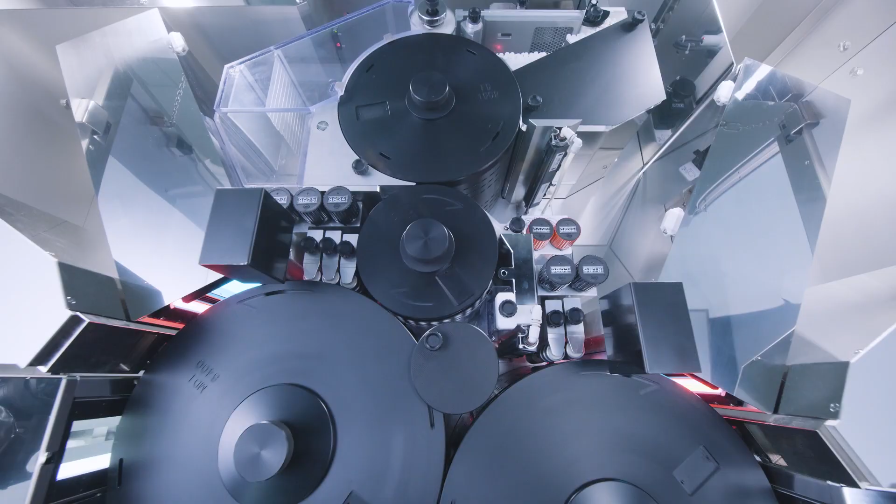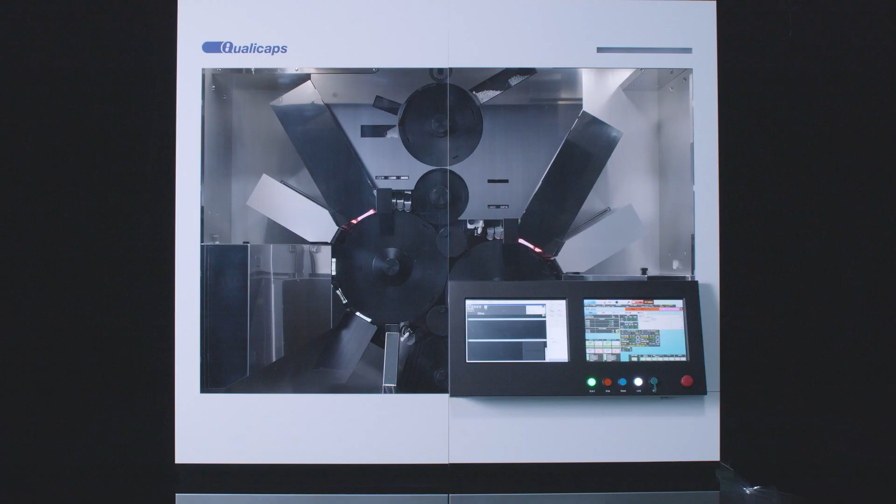There has been an increasing need for tablet printing in order to prevent accidental ingestion and counterfeit drugs. Qualicaps' newly developed IMS-400i is a tablet inkjet printer capable of contactless tablet printing. Let's take a look at the IMS-400i's printing process.

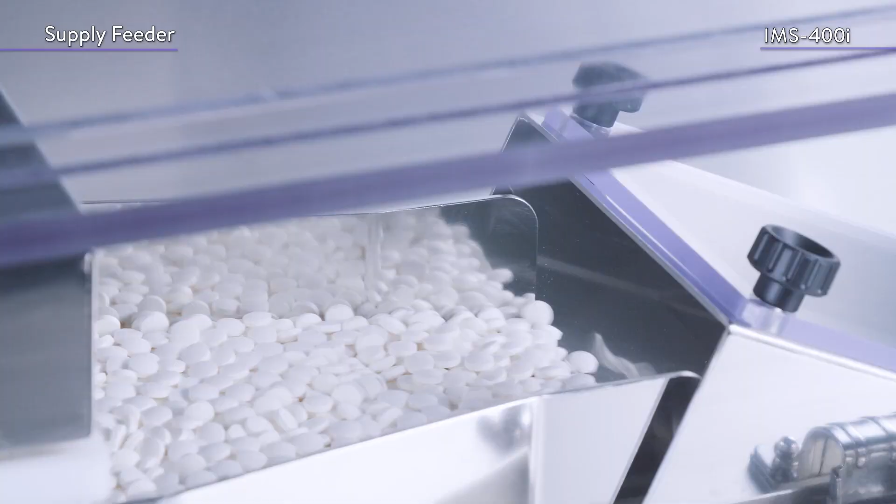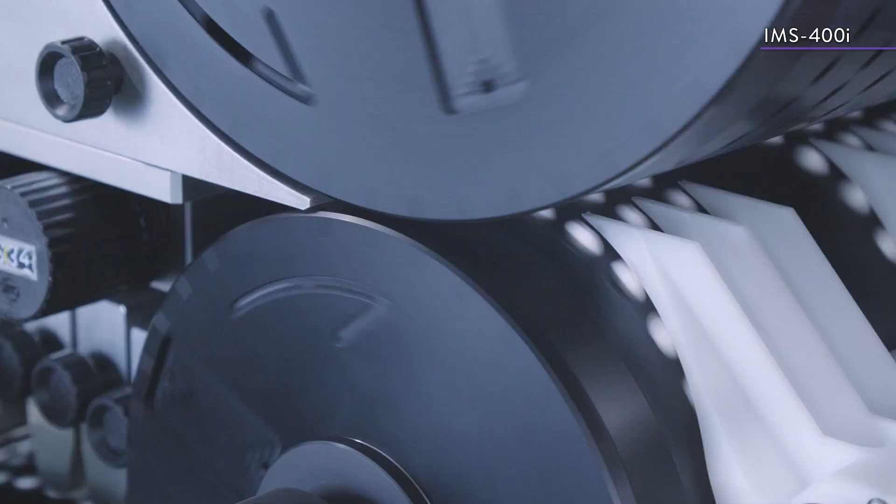The tablets that are fed into the hopper pass through the supply feeder and are then fed into the supply drum. Next, the rectifier drum aligns the tablets so that their surfaces are horizontal for printing and then transfers them to the marking drum.

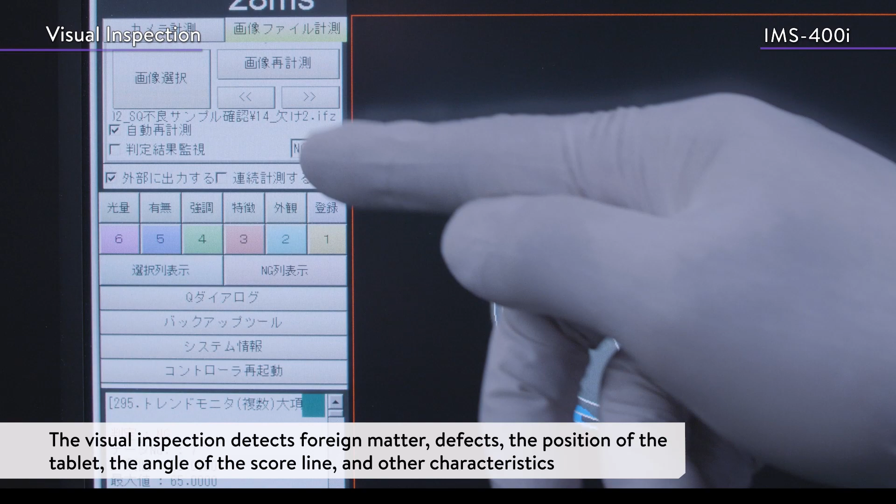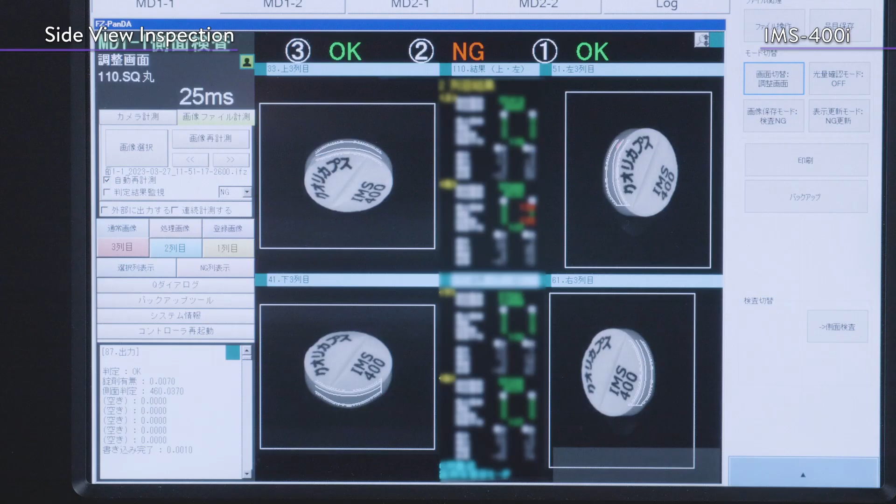In the first marking drum, the surface of each tablet is visually inspected first to detect foreign matter, defects, the position of the tablet, the angle of the scoreline, and other characteristics. The inkjet printer then prints according to the position and the angle of the tablet, followed by the side view inspection. Last is the printing inspection.

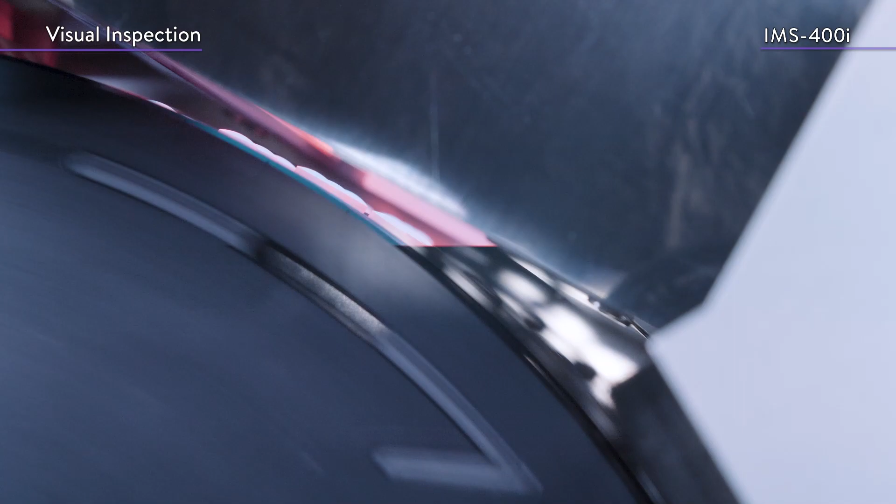After the front surface has been printed on and inspected, the tablets are transferred to the second marking drum. The reverse side of the tablets will undergo a visual inspection to detect their features, which is then followed by the side view inspection and the printing inspection.

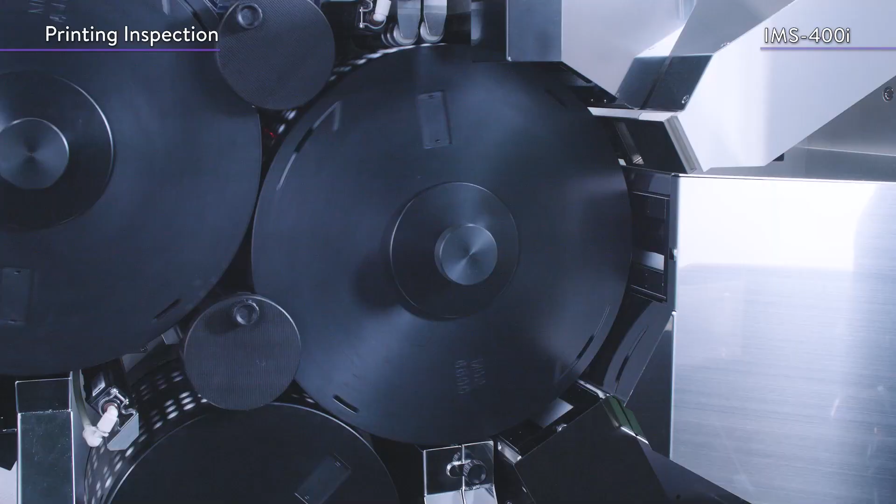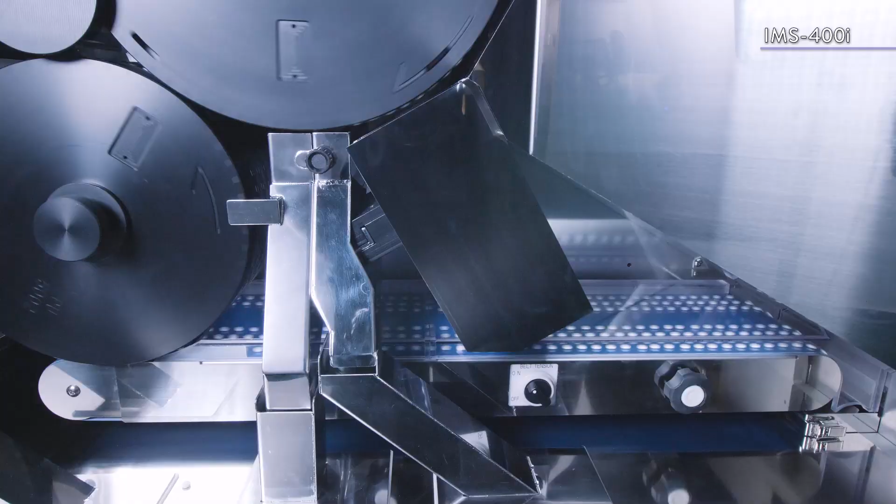The defective tablets are separated according to whether they have visual defects or printing defects and are collected in their respective boxes. As a result, only the tablets that are deemed to be non-defective are discharged. The IMS-400i has achieved its high processing capacity by utilizing Qualicaps' unique drum transfer system.

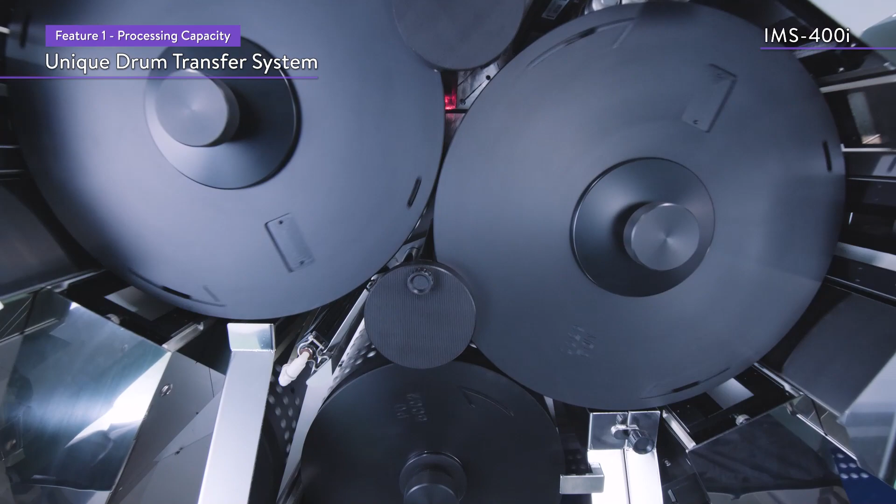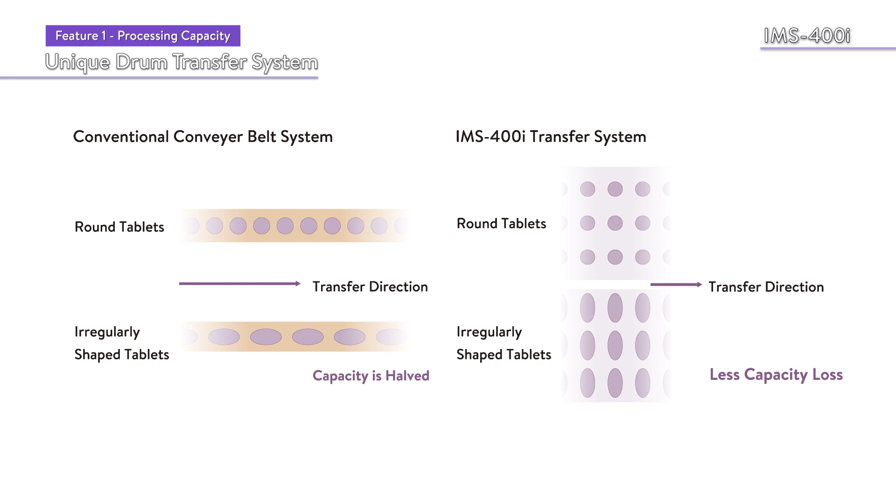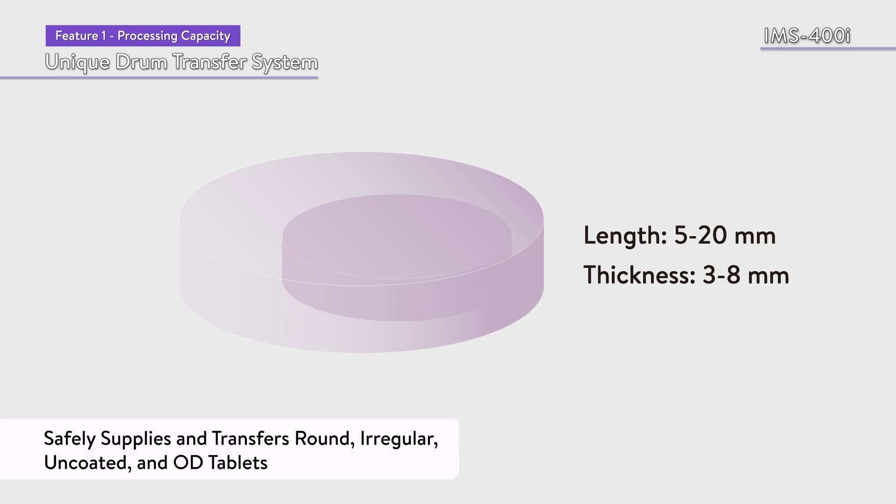Compared to conventional conveyor belt systems, the drum transfer system has less fluctuations in processing capacity due to tablet shape, and it can safely supply and transfer tablets of various shapes, such as round ones, irregularly shaped ones, as well as extremely powdery tablets such as uncoated and OD tablets. As a result, the processing capacity can reach up to 400,000 round tablets per hour and 350,000 irregularly shaped tablets per hour.

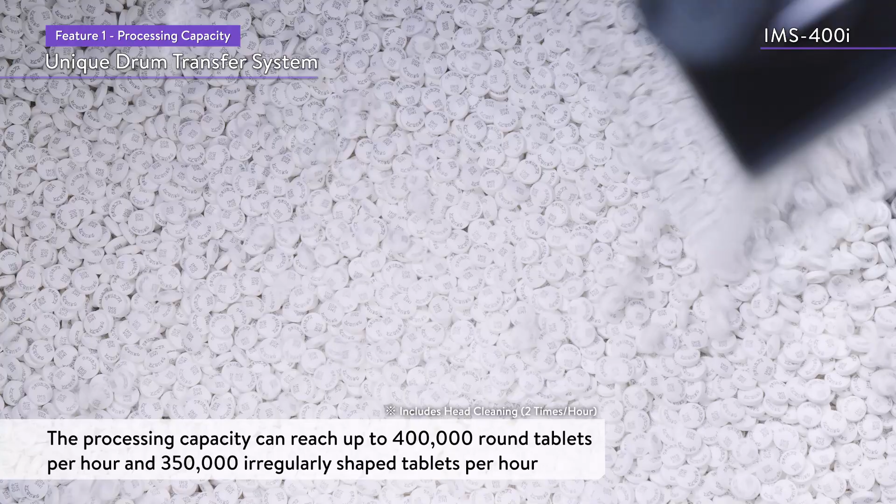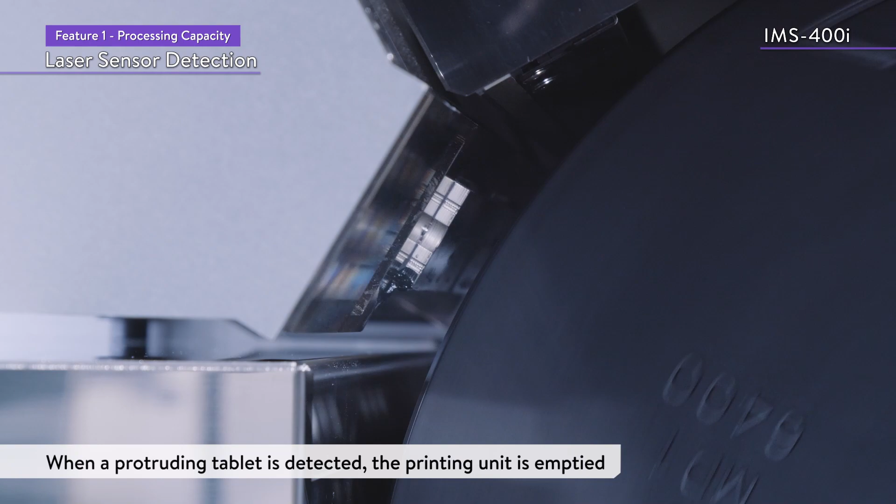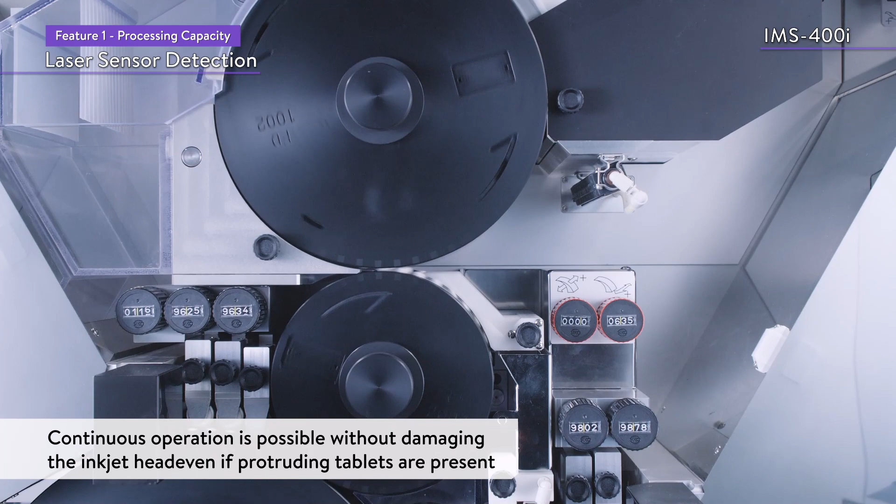In addition, a laser sensor detects protruding tablets before inspection and printing. When the laser sensor detects a protruding tablet, the mechanism empties the printing unit. This allows for continuous operation without damaging the inkjet head, even if protruding tablets are present. In addition, the protruding tablets are ejected unprinted so that they can be reinserted.

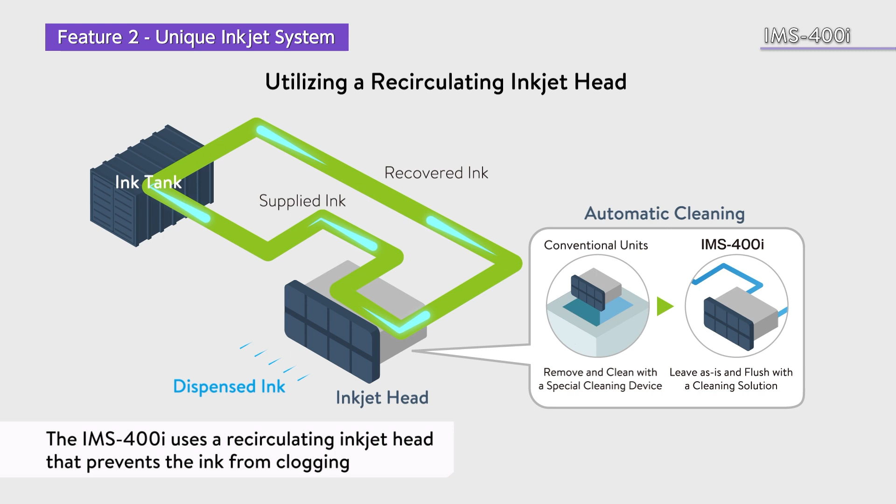The IMS-400i is equipped with a unique inkjet system. The IMS-400i uses quick-drying ink, which is highly visible even in small amounts. In addition, the use of a recirculating inkjet head, which is less prone to clogging, eliminates the need for long-term ink cleaning and reduces operating costs.

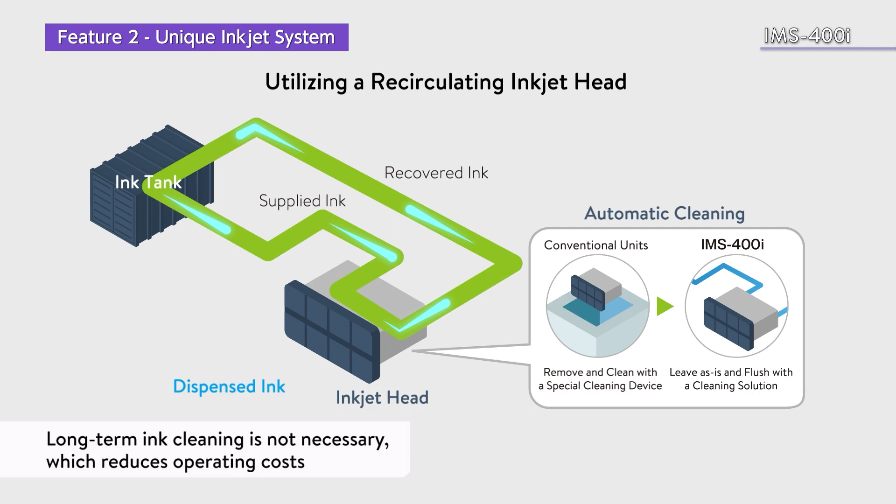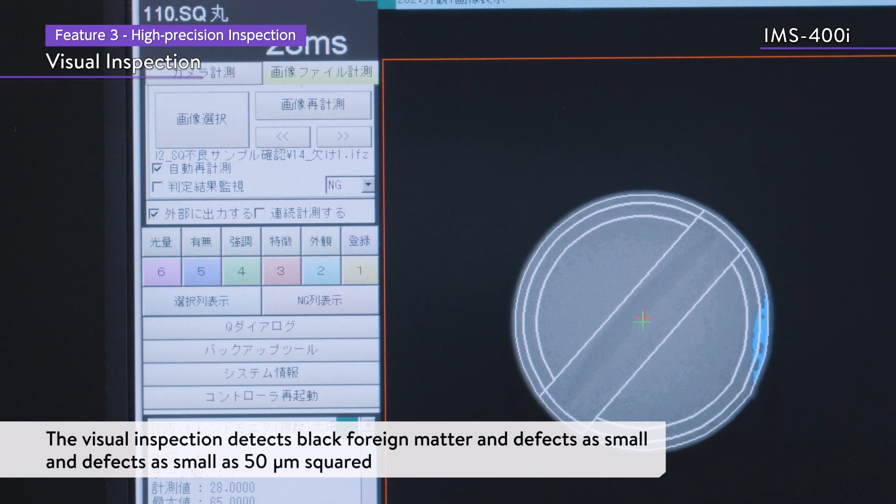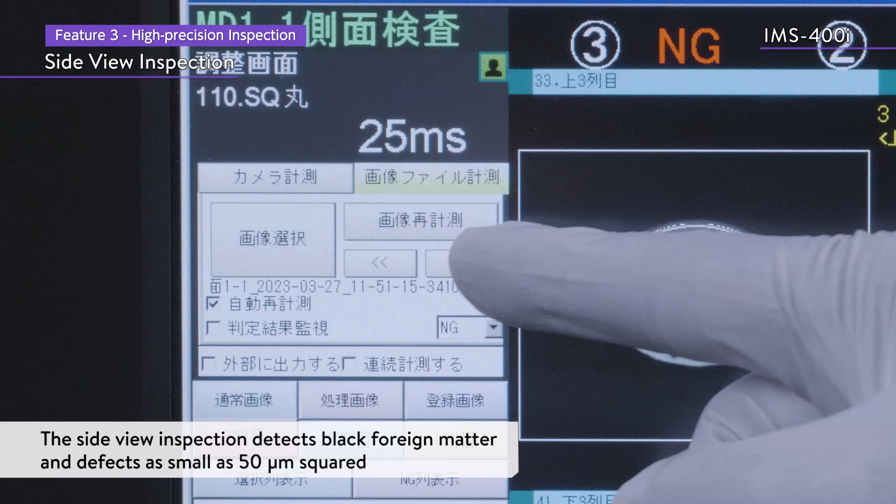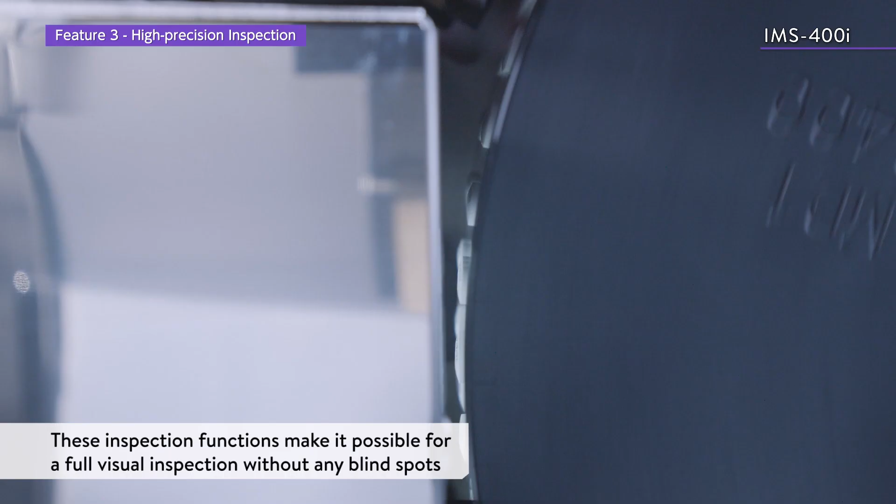The IMS-400i provides high-precision inspection. The visual inspection detects black foreign matter and defects as small as 50 micrometers squared, and the printing inspection detects missing text. The side view inspection detects black foreign matter and defects as small as 50 micrometers squared. These inspection functions make it possible for a full visual inspection without any blind spots.

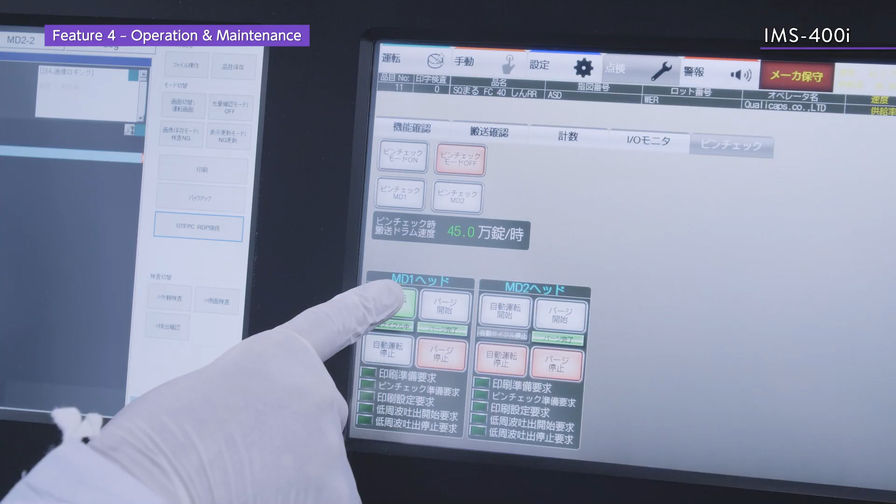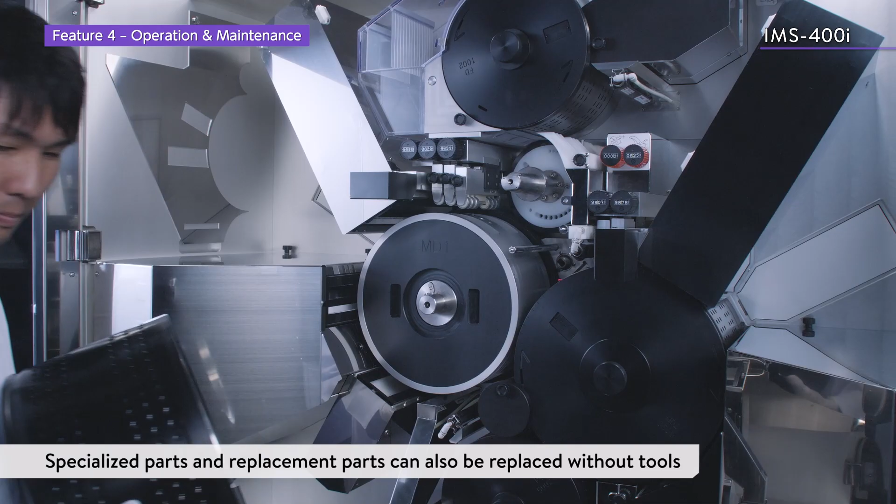The IMS-400i is easy to operate and maintain. Basic operations can be performed from the front of the equipment. Specialized parts and replacement parts can also be replaced without tools. In addition, the drums can be stacked, allowing for compact storage.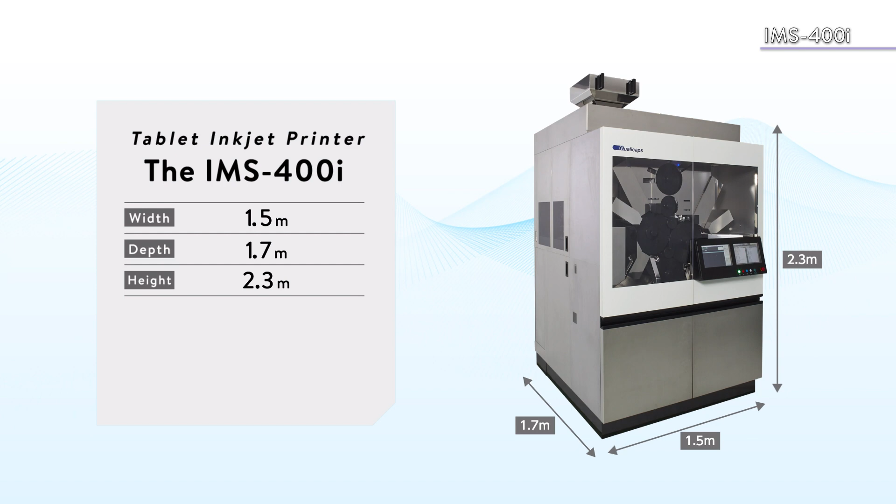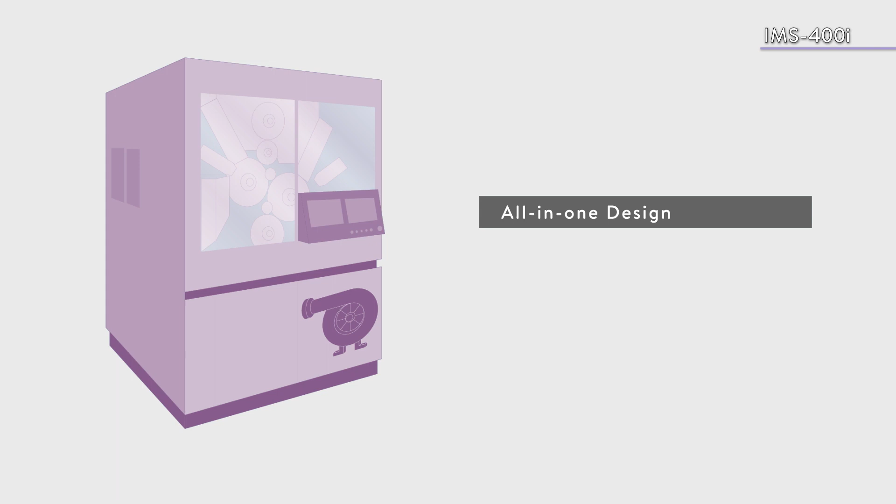The IMS-400i is 1.5 meters wide, 1.7 meters deep, and 2.3 meters high. The built-in transfer blower, control board, automatic ink cleaning unit, and even the footprint space, which is one of the smallest classes in the industry, allow for greater flexibility in installation. The all-in-one design reduces energy consumption to 1/3 that of conventional models, contributing to energy conservation.

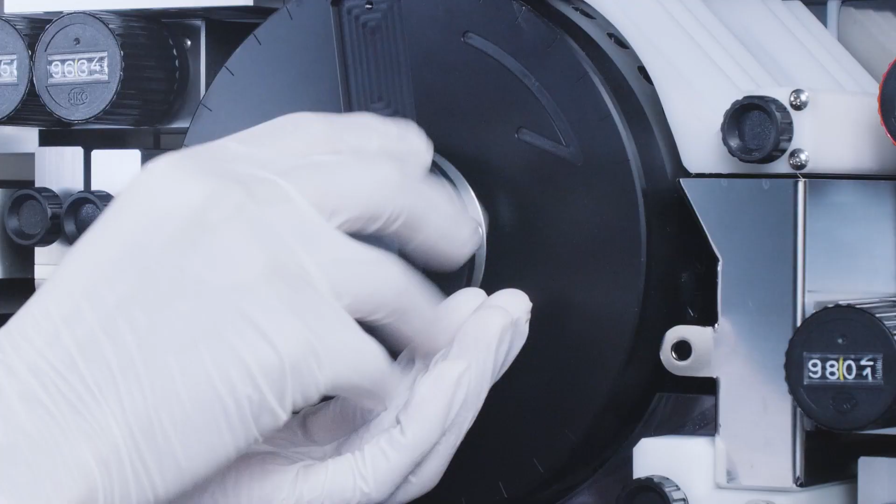For high speed, high-quality printing, with easy maintenance and a compact design, the IMS-400i tablet inkjet printer was developed to meet a variety of printing demands.